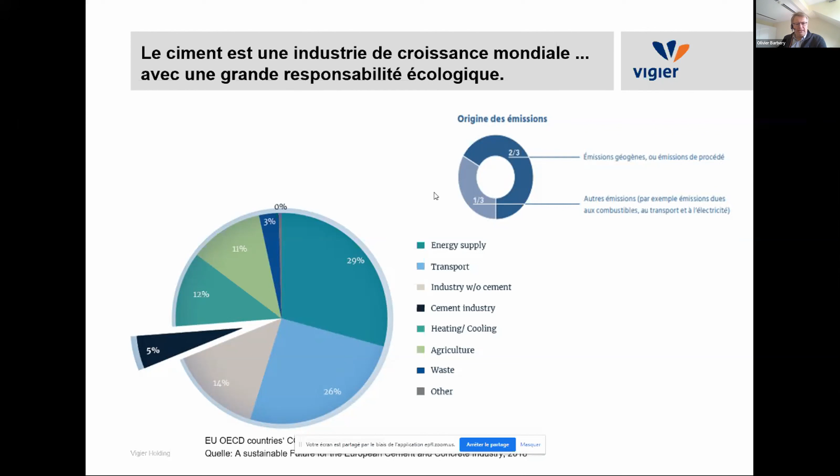Si on regarde concrètement sur Ciment Vigier ce que ça signifie en termes de développement durable, on a la chance de posséder une carrière, donc un accès aux ressources de marne et de calcaire, les éléments principaux pour former du ciment. Cette carrière est située à Péry, à côté de notre usine, et a la particularité d'avoir une autorisation d'exploiter pour encore 90 ans. C'est une spécificité du canton de Berne: le ciment a été reconnu comme matériau indispensable par la Confédération suisse, et le seul canton qui a traduit ça concrètement en donnant des autorisations d'exploiter en conséquence a été le canton de Berne. Ça nous donne un avantage énorme par rapport à nos concurrents, puisque l'actionnaire qui investit chez nous sait qu'il le fait avec la perspective d'un accès aux ressources garanties pour les 90 prochaines années.

Tout commence donc à la carrière, par l'exploitation, et même si c'est un élément mineur de l'impact environnemental, le transport des matériaux vers l'usine a déjà un impact. On est très fiers chez Ciment Vigier d'avoir été, en 2018, à l'origine de la fabrication du premier dumper électrique autonome, qui travaille chez nous depuis 4 ans maintenant. C'est toujours une première mondiale, il n'y a pas eu d'autres exemplaires, et c'est lié à la particularité de notre site: nous avons un site downhill, on exploite le sommet de la carrière et on descend les matériaux vers le concasseur. Ainsi, si le camion descend chargé avec 65 tonnes de matériaux, comme on le voit sur la photo, il va pouvoir charger ses batteries en descendant, et utiliser cette énergie emmagasinée pour remonter à vide.

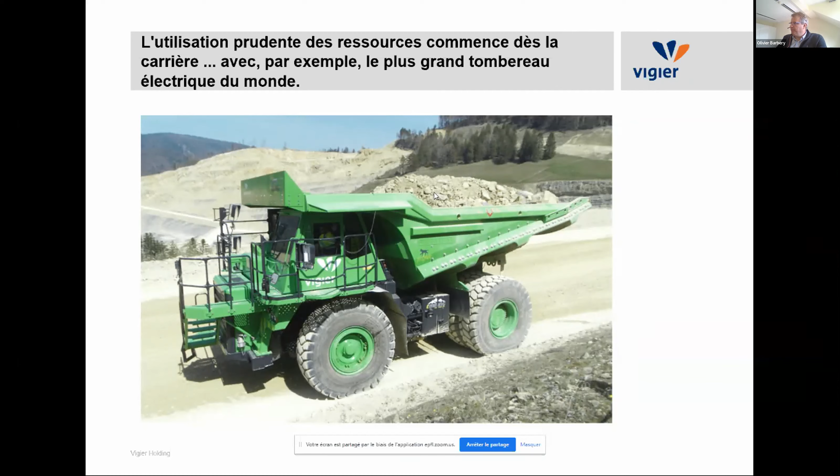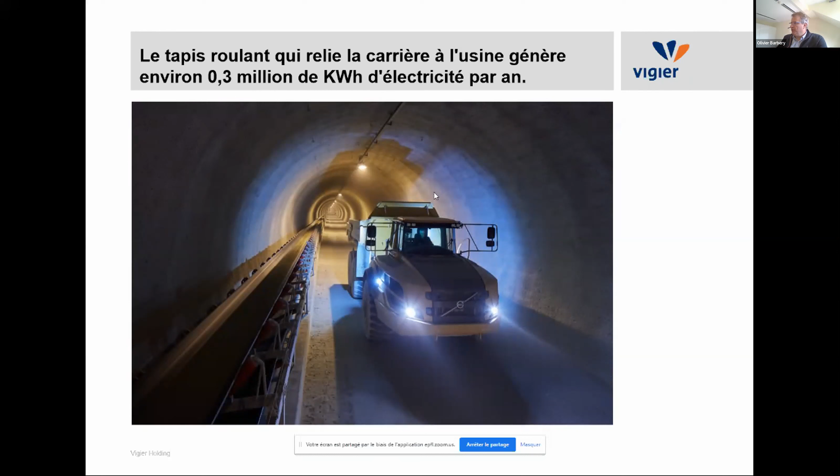Les matériaux sont ensuite amenés à travers un tunnel sur la bande transporteuse à gauche. L'alternative serait de les descendre avec des dumpers électriques ou traditionnels, mais nous travaillons avec une bande transporteuse qui profite également de la différence de niveau entre la carrière et l'usine pour produire son électricité, à peu près 300 000 kWh par an, ce qui correspond grosso modo à la consommation électrique de tous les transports internes de l'usine. Donc tous les matériaux transportés dans l'usine, toute l'énergie électrique nécessaire à leur transport en interne, sont couverts par ça.

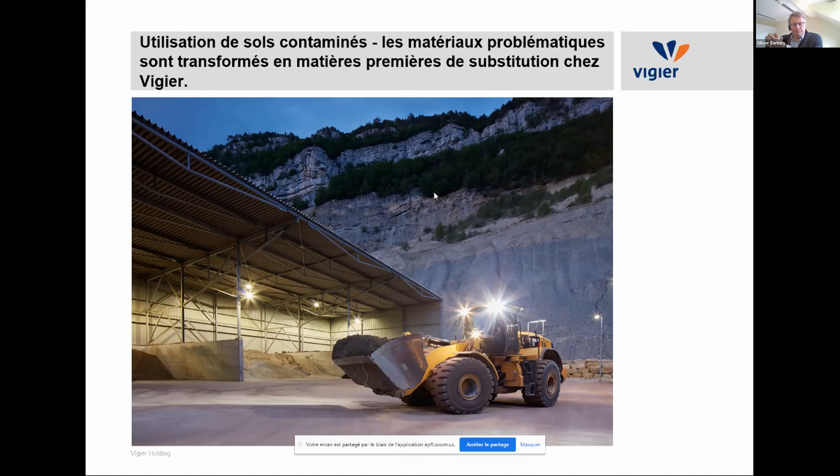Enfin, concernant les matières premières naturelles, afin de minimiser l'impact sur la consommation de ressources naturelles, on a développé depuis plusieurs années la substitution de matières premières par des matières premières alternatives, très variées: ça va des terres polluées jusqu'à des cendres issues de processus de combustion comme la fabrication du papier. Chez Ciments Vigier, cette année, on va être à peu près à 15% de substitution, et l'année prochaine on ambitionne d'atteindre ou dépasser les 20%. On consomme à peu près 1 million de tonnes de matières premières par an venant de la carrière, et on espère dès l'année prochaine en substituer 200 000 tonnes, ce qui veut dire que chaque 5 ans, on allonge la durée de vie de la carrière d'1 an. Ce sont toutes des choses concrètes qui existent.

Tous ces matériaux, après broyage, dans les bonnes proportions et la bonne chimie, vont être brûlés dans un four à très haute température, puisque la température que la matière doit atteindre pour former le clinker, qui sera le principe actif du ciment, est de 1450 degrés. On a à Péry un four dit moderne - je souris en disant ça car il date de la fin des années 60, mais en termes de technologie, il n'y a pas eu de meilleure technologie depuis. C'est un four voie sèche avec précalcinateur.

Et donc, dans ce four, entre 0 ou 20 degrés et 800 ou 1000 degrés, le CO2 contenu dans la pierre, donc dans le carbonate de calcium, va partir. Ensuite, la matière va être cuite dans le four. Pour cette cuisson, on utilise des combustibles. Le combustible traditionnel chez Ciments Vigier, c'est le charbon, mais ça pourrait être le gaz naturel ou le schiste, etc. Il y a différentes possibilités.

Un moyen de réduire l'impact CO2 lié à la combustion, c'est de remplacer ces combustibles aussi loin que possible par des combustibles biogènes ou par des combustibles alternatifs. Donc le principe de l'usage des combustibles alternatifs peut être résumé sur ce slide.

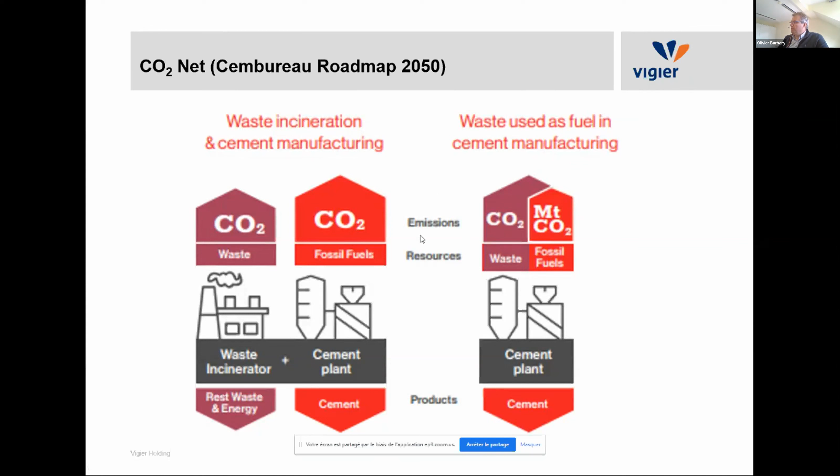Par contre, les déchets et leurs parties cendreuses vont être incorporés comme matière première dans le clinker et donc dans le ciment, et on produit du ciment. Donc vous comprenez le bénéfice: en faisant ça, on va éviter des émissions de CO2 au niveau de l'incinération. C'est le principe de fonctionnement du remplacement des combustibles nobles par des combustibles alternatifs.

Dans le cas de Ciments Vigier, j'ai repris ici les résultats 2021. En 2022, on termine le mois d'octobre aujourd'hui, et on est sensiblement sur les mêmes bases que 2021. Donc, en 2021, on a substitué 97,3% de nos combustibles fossiles par des combustibles alternatifs, et de ces 97,3%, pratiquement 38% étaient des combustibles biogènes.

Les combustibles biogènes, comme le bois de démolition ou de construction, sont considérés comme neutres au niveau CO2. Et si on parle de bilan net de CO2, on peut considérer l'ensemble des combustibles alternatifs.

Sur ce graphique, depuis 2015, pour reprendre les 6 dernières années, on est passé de 80% de substitution à 97,3%. La moyenne suisse, nous y compris, c'est la barre sur la droite — ce sont des chiffres publics, publiés par cemsuisse. En 2020-2021, ils étaient au même niveau, 69,5% de substitution. Si on prend la moyenne européenne, elle est aux environs de 50%.

Vous voyez qu'on est très fiers dans l'usine de Péry d'avoir réussi à pousser l'exercice quasiment jusqu'aux limites, puisqu'on n'est pas autorisé à démarrer un four avec autre chose que des combustibles nobles. Dans notre cas, c'est du light oil, de l'huile légère, et ça correspond à 2,5% de notre consommation énergétique.

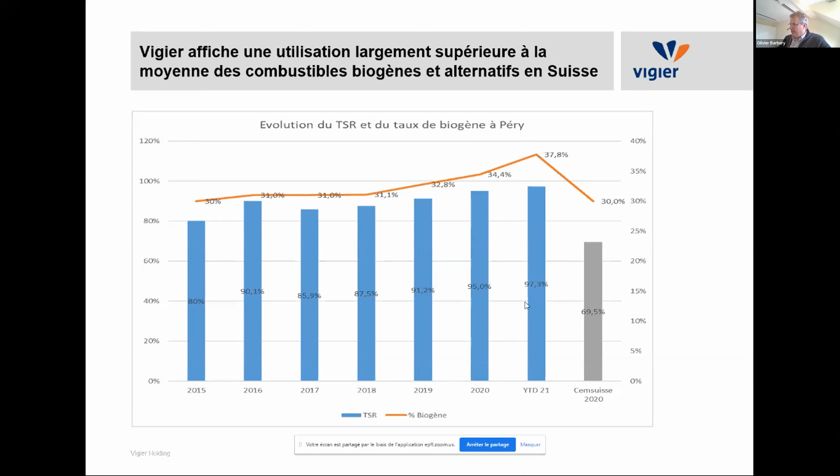Donc on a encore un potentiel d'amélioration de 0,2%; on est quasiment virtuellement à 100% de substitution. Ce qui veut dire concrètement que, dans l'impact CO2 de nos produits, cette partie combustible peut être enlevée. Ça montre que c'est possible et que c'est possible de le produire. On l'a fait pendant une année complète, et donc ça fait partie des leviers qui existent pour l'industrie pour solutionner cette partie — un tiers des émissions de CO2 qui vient des combustibles.

Si on regarde le bilan CO2 net de Ciments Vigier sur l'ensemble des produits ciments produits chez nous, par rapport à l'année de référence de 1990, on a évolué de 667 kg de CO2 par tonne de ciment jusqu'à 408 kg, résultat de l'année dernière. Cette année, on est sur des prévisions proches de 400 kg, donc on continue à s'améliorer. Vous voyez que c'est possible.

La moyenne suisse, nous y compris, est plutôt de l'ordre de 550 kg si on regarde les émissions nettes de CO2. Donc vous voyez que l'exemple concret de Péry montre qu'on peut déjà faire des choses concrètement.

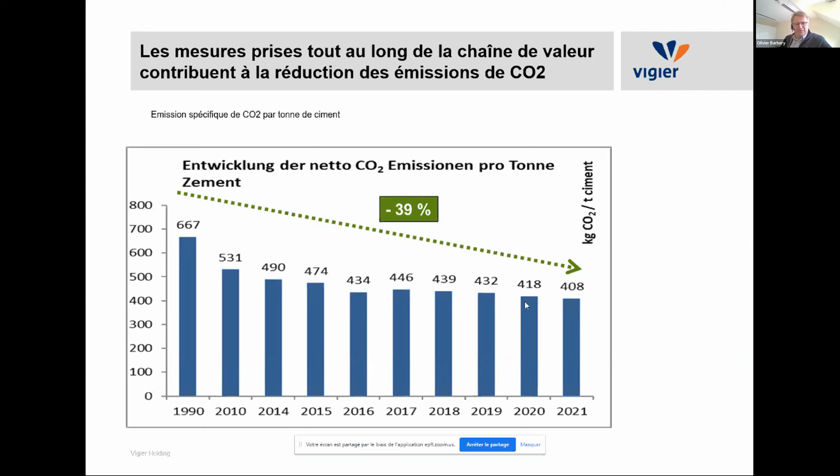Ce qui est sûr, c'est qu'au rythme actuel, on ne sera jamais à zéro émission nette de CO2 en 2050, qui est notre objectif. Pour ce faire, il faut accélérer l'évolution. À titre d'illustration, cemsuisse, la faîtière suisse de l'industrie cimentière, a publié, sur base de chiffres concrets, les 6 leviers à la disposition de l'industrie pour atteindre l'objectif de zéro émission nette de CO2 en 2050.

Donc ça, c'est à nos collègues concurrents de réaliser la chose. Le deuxième levier, c'est de mettre moins de clinker, donc qui est le produit issu du four, de la cuisson, dans les ciments. Là, il y a encore aussi un potentiel de 17% par rapport à la situation actuelle. Et ça se fait comment? Ça se fait par l'optimisation des recettes, donc avoir un clinker le plus efficace possible pour en mettre le moins possible dans le ciment.

Ça passe aussi par l'utilisation de matières premières décarbonées. Je vous ai cité l'exemple des cendres de papier. Donc, tout déchet cendreux issu de l'industrie, une industrie thermique, est potentiellement une source de matière première pour nous, avec l'avantage que tout le calcium qu'il contient aura été théoriquement décarboné. Donc, plutôt que de les mettre en décharge, il vaut mieux essayer de les réutiliser comme matière première secondaire dans l'industrie cimentière. Et enfin, on a des nouvelles formulations de béton.

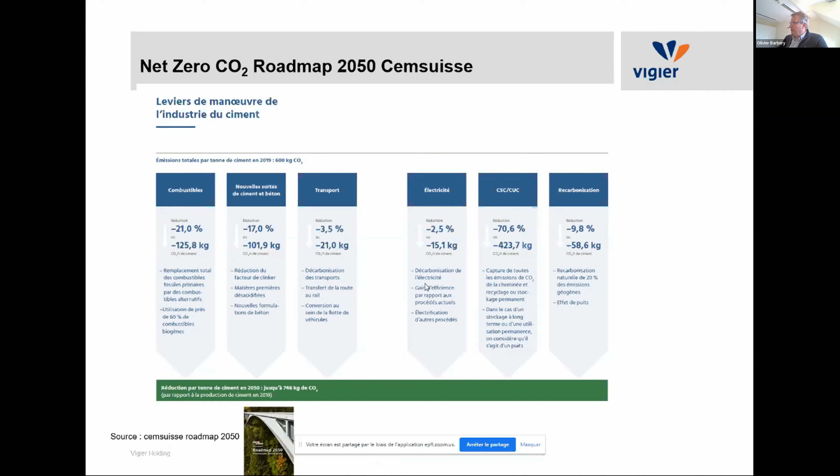On estime que nous, on devra sauver environ 300 kg de CO2. Le reste du travail aura été fait. Au niveau du transport, je voulais juste dire, pour terminer sur cette note, qu'on a acquis un camion 100% électrique et un camion toupie béton également 100% électrique chez Vigier, ce qui nous permet, depuis la carrière jusqu'à nos clients finaux, de sauver aussi ces 3,5% de CO2.

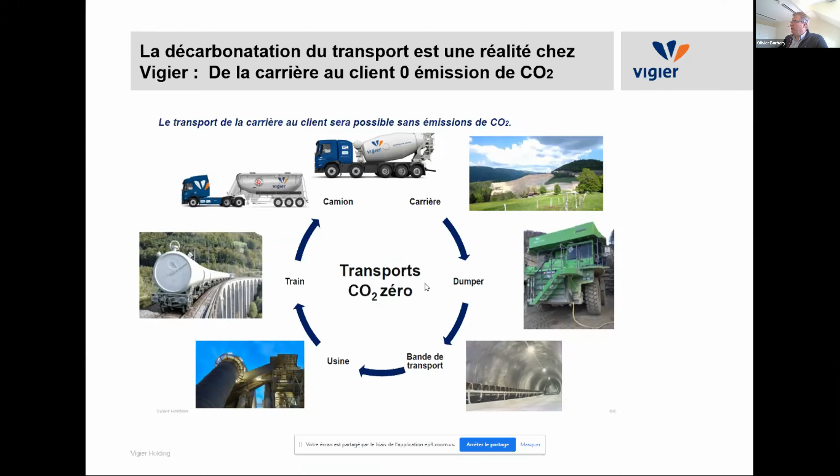Donc voilà la conclusion. On s'est engagé à décarboner nos produits et notre processus d'ici 2050. Au niveau des produits, on est pas mal avancé, mais il reste encore un peu de chemin à faire, à peu près un tiers du chemin. Et au niveau du processus, ça passera par le Carbon Capture and Storage et le Carbon Capture and Usage, auquel nous, en tant que groupe cimentier, on croit. Donc, transformer ce CO2 émis à notre cheminée en un produit utile ou en une énergie utile.

Et pour ce faire, vous l'avez compris, on a besoin d'avoir, ou qu'on nous garantisse, une forme d'accès au marché des combustibles alternatifs, qui est une priorité, mais aussi que les mentalités évoluent et qu'au niveau des matières premières disponibles, qu'on s'éloigne du tout à la décharge pour aller vers des solutions de recyclage ou de valorisation, notamment chez nous en cimenterie.

Voilà. Merci Olivier, encore une fois pour cette présentation très intéressante et la réponse aux questions.

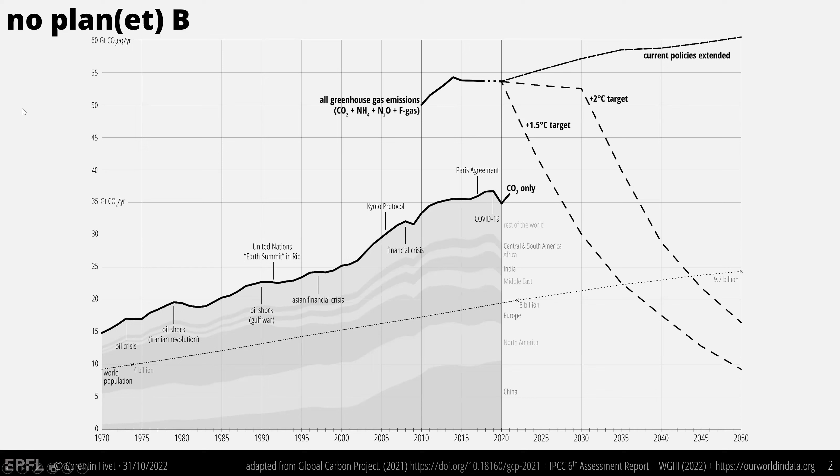All right, so a few things have been said. The discussions were very interesting, at least what I could grab from it. I just wanted to show this graph again, to remind that yes, we should try to limit our CO2 greenhouse gas emissions as much as we can, but we should also remember that whatever we do will never be enough, and so we should always try to do more in order to reduce those impacts.

Those are numbers that were given already in the previous presentations, except that here the numbers are from the worldwide CO2 emissions. And indeed, the construction industry has a huge responsibility in global warming. 11% is a lower bound. According to more recent numbers, we can extract some percentages that are attributed to other industries and realize that they're actually related to the construction industry.

And so CO2 emissions related to the activity of constructing buildings, infrastructure, and demolishing it are responsible for about 20%, maybe even a bit more, of all CO2 emissions. And next to it, we see also that 28% are related to the operation of buildings, so the heating, the cooling, the electricity needed in buildings and so on.

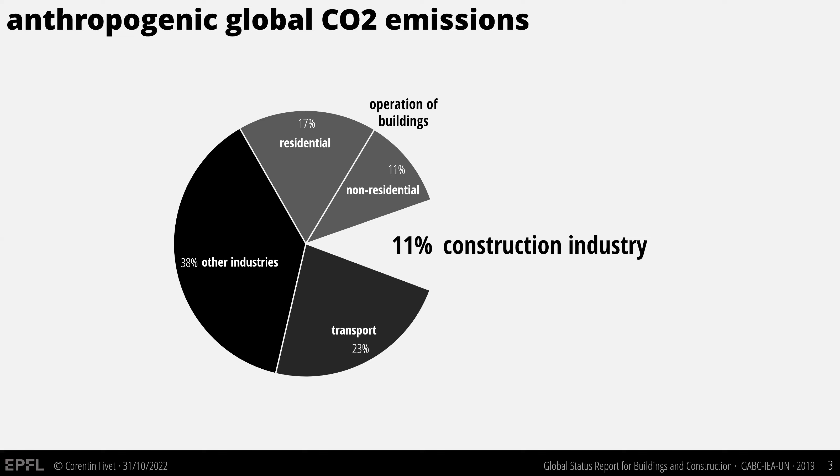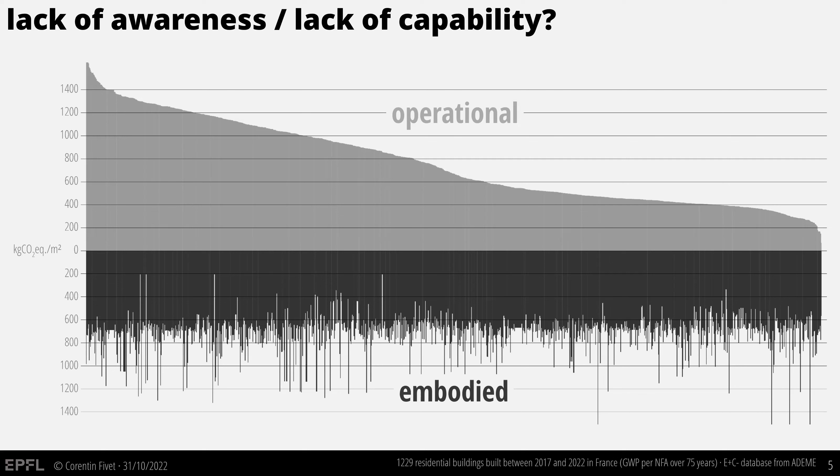But there is still a question on whether society, the industry, can actually reduce this embodied share in buildings, because on the bottom part of this graph, we clearly see a kind of threshold. So can we actually reduce the greenhouse gas emissions per square meter of new buildings? That's almost an open question at the moment, and should not be.

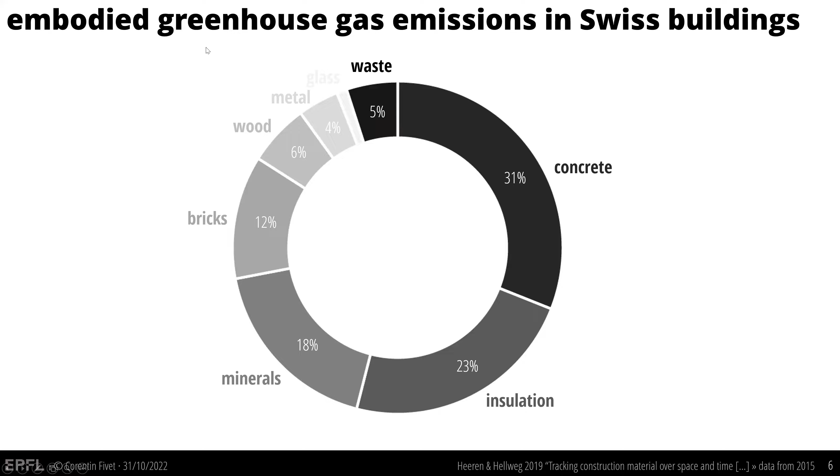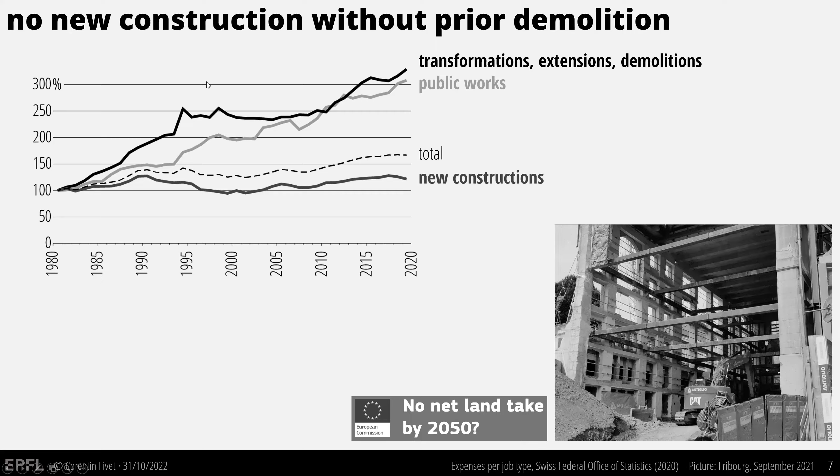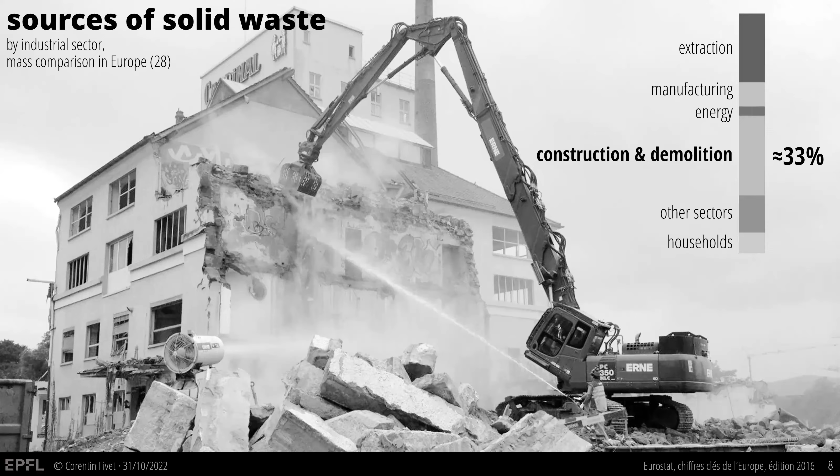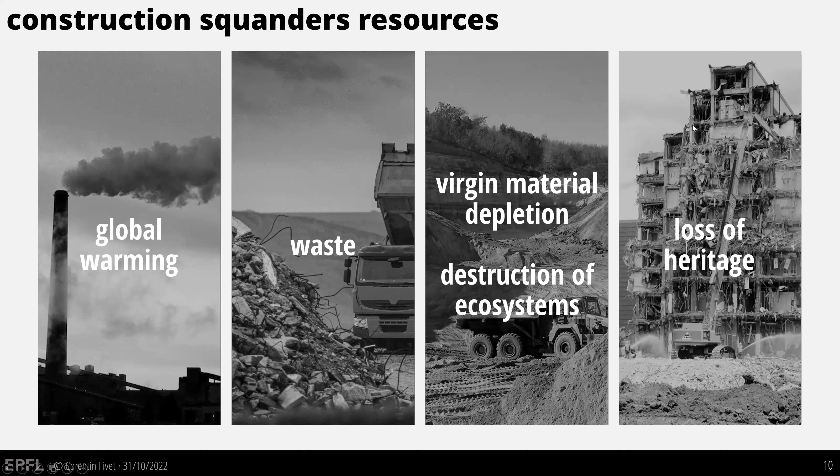And as a consequence, as was presented earlier, the construction and demolition industry accounts for 33% of all solid waste, which is not negligible. So the construction industry, in short, squanders resources: global warming, waste. There are also issues related to virgin material depletion, and more precisely to the ecosystems that are destroyed on the way. And every time we demolish, we also lose a part of our heritage and investment made earlier. So one direct conclusion we can draw is that construction is injurious to Earth.

Yes, we should try to avoid, reduce the CO2 emissions by improving the processes that we are commonly using, as was presented before. But the very first question is indeed this one: shall we construct? Shall we demolish? Shall we transform the built environment? And probably if we ask that question before every single operation, we could realize that most of those transformations are not necessary.

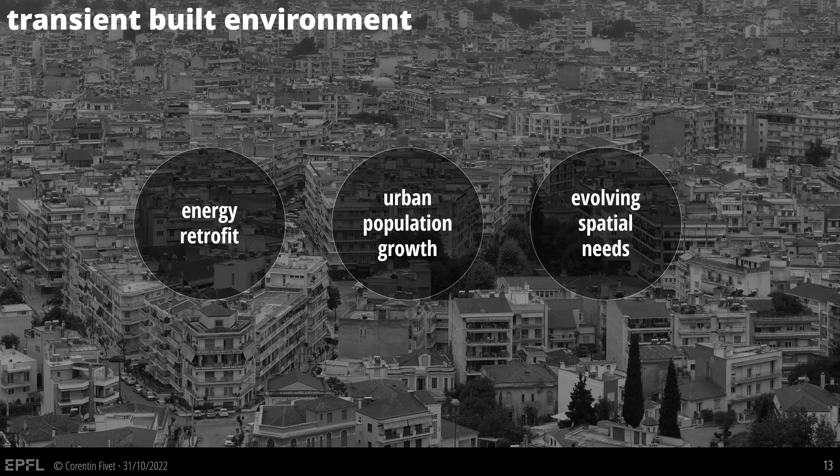But there are other transformations that remain needed. Buildings, we need to insulate them. So there is a need for energy retrofit, which also has an impact on embodied emissions. There is also a need to welcome more people in dense areas in Europe, but also elsewhere in the world. And we've seen it with COVID: there is also a need to quickly change the spaces that are provided by architecture. And so the built environment is transient. We need to replace some of it, and the question is how to do it.

And one first remark that we should make is that most of the time when we demolish a building, the building is of good quality. We didn't need the spaces provided by the buildings that we have here in front of us, for instance, in Fribourg, but the beams, the slabs, the walls were still of good quality. And so it's not because we don't need the spaces provided by the buildings that we do not need the materials that make those spaces available.

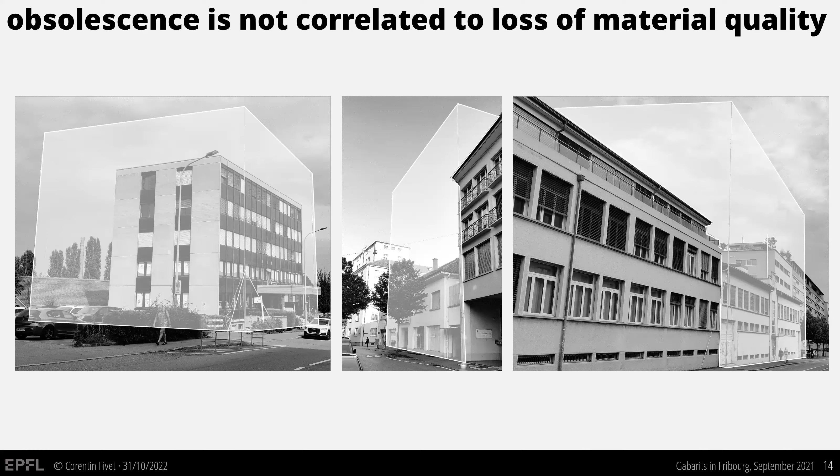And realizing that allows us to better understand what can be done through the principles of circular economy. In circular economy, the goal would be to maximize the service life of existing products through different strategies in a given hierarchy. First we want to use the existing products as much as we can, and only if we cannot, we adapt those products on site, and we see a loop being created on top of these graphs. And when we cannot adapt the products on site, then we can reuse the parts in new systems, in new locations for new purposes.

And then we go back up this graph, and the new systems, we want to use them as much as we can. Maybe we adapt them, and maybe we reuse the parts again and again. And only after that, once we cannot reuse the parts, then recycling, so reprocessing the material, would be an option. Currently, when we speak about circular economy in many contexts, recycling is the main first strategy that comes to mind, but it's actually the very last one on the ladder.

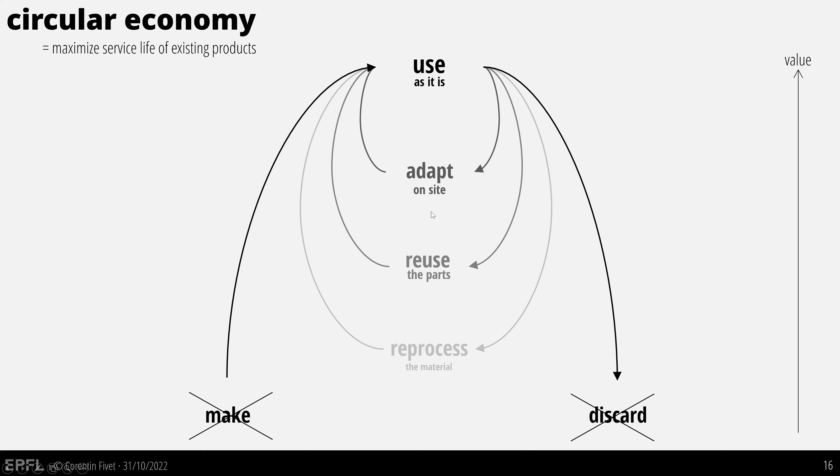Reuse, so what does that mean? It's always better to understand it through examples. Here is an example that I show a lot. It's a timber bridge that was built in 1810 over the Rhine River at the border between Switzerland and Germany. 100 years later, it was decided that the bridge was too small, not high enough, so the community decided to replace it with a bigger one. But some monks from a monastery nearby reclaimed some of these beams and columns in order to build the barn pictured on the bottom of this slide.

And we can actually see traces of the cuts in the columns. Those traces are the testimony of the previous use of those beams in the bridge. And that barn, built in 1920, is still in use today. The picture is from 2019, but it's still standing. So in the end, we have a 100-year-old building made of components that are 200 years old. And that's really the goal of circular economy and reuse: to have construction components that last longer than the buildings they are part of.

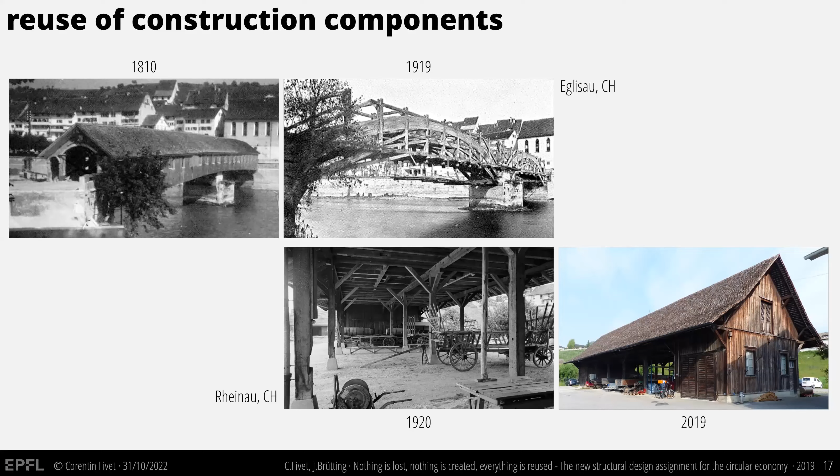And today in the construction industry, reuse is moving a bit. We see more and more startups providing services to reuse building parts, but what is mainly reused are not load-bearing components such as the ones shown here. And if you remember the very first graph that I showed, if we want to reduce CO2 emissions through reuse, we need to also reuse load-bearing components. There are examples in the past, but not a lot. It's not common practice yet.

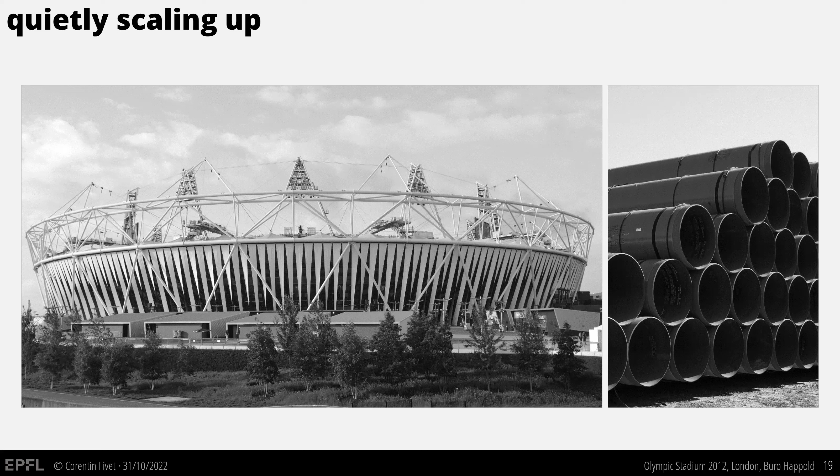Here is the London Olympic Stadium that was made with reclaimed oil pipelines that were ordered in too large quantities, and the engineers realized that by just changing the design of the stadium a bit, they could reuse those pipelines as new structural members. Here are other examples given by Toni Rüttimann, a Swiss engineer who built hundreds of pedestrian footbridges while reusing cables from ski lifts and oil rigs.

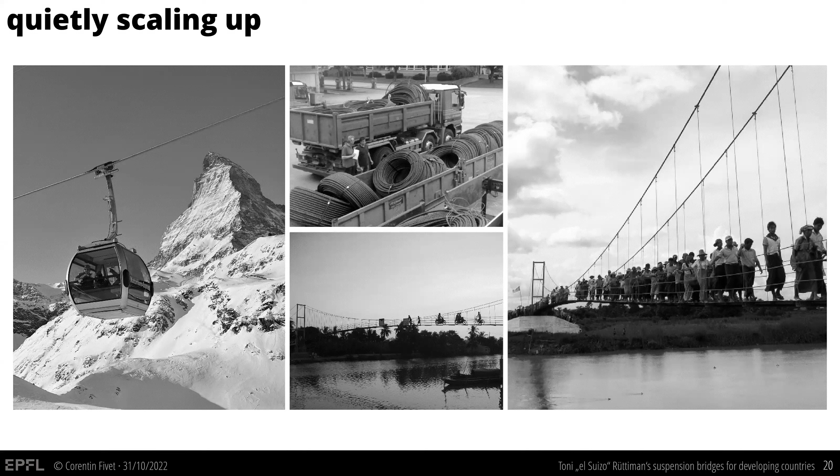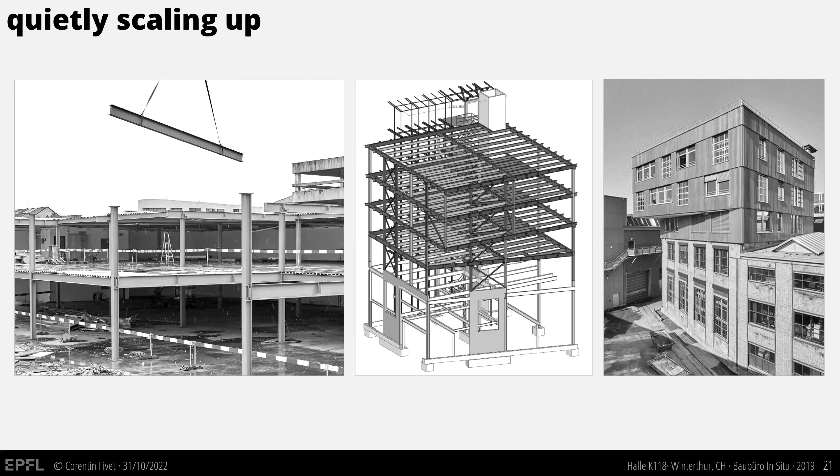So showing that, yes, components could be reused even for structural purposes. In Switzerland, the most published example so far, and the biggest operation so far, is this one here in Winterthur, where an existing building has been extended, and the load-bearing systems are beams and columns in steel that are reused from a distribution center.

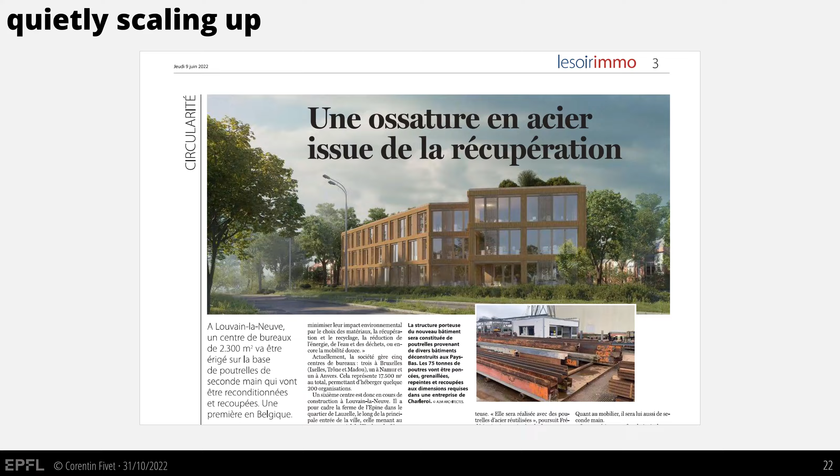Here is another example where 75 tons of old steel from the Netherlands will be reused for a new building in Belgium. But those are very unique examples, and the practice is not banal yet. So it's not like before the industrial revolution, where reuse was just common sense. It made sense in terms of economy. It made sense in terms of use of resources, of efforts to be put into the operation. And today that is not the case.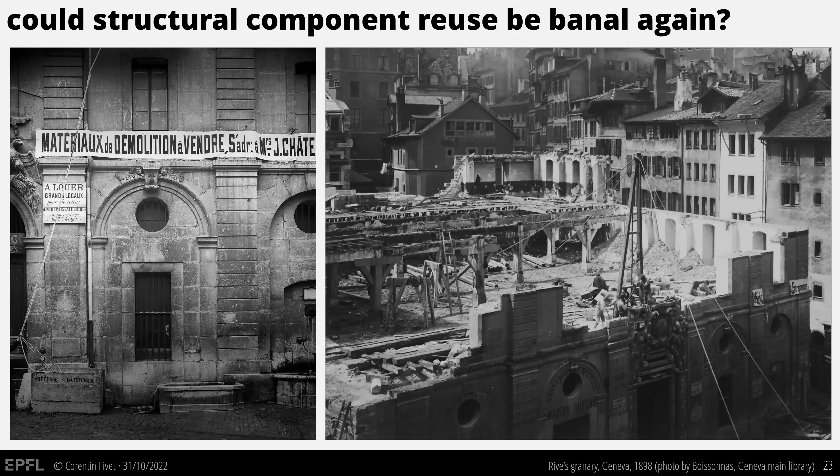And so the question that we ask ourselves at the Structural Exploration Lab is what can we do in order to make the reuse of load-bearing components more banal and more a common practice. I will show here two examples of things that we've been working on to see how the industry can evolve in that direction. The first thing to understand is that there is a change of design paradigm.

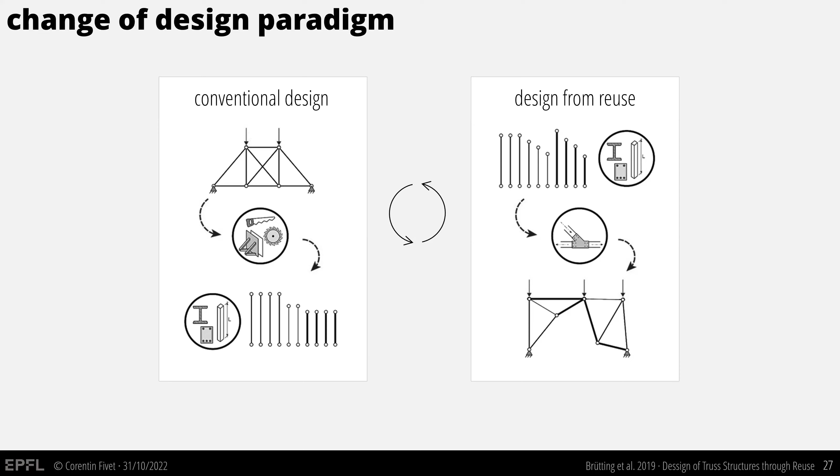So in the conventional design process, first the designers, architects, engineers would provide an idea of the main shape of the structure, and then little by little that structure would be analyzed, and we would end up with a precise description of how the pieces should be manufactured. When we want to reuse an existing stock, the members come with known properties. They have given lengths, given cross sections, given material. We cannot change them, and the new goal is to find the best way to reassemble them in the new structure. And usually the stocks to reuse can be very big and varied.

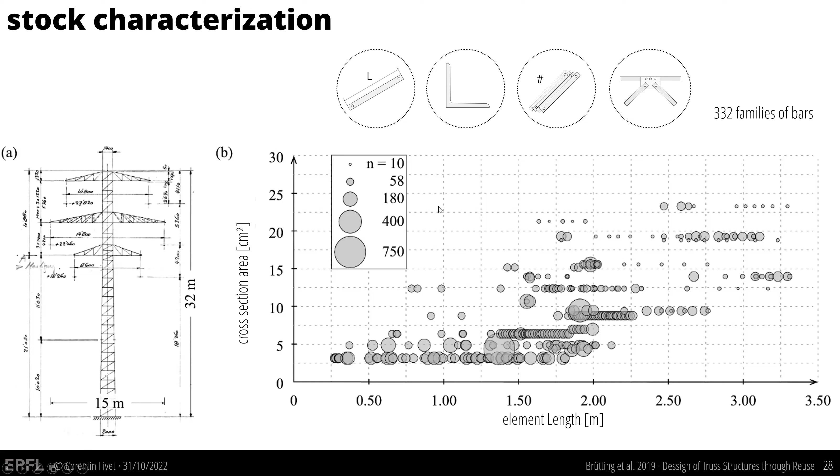Here is an example, a case study where we wanted to know how we could reuse those elements from electric pylons that are about to be dismantled in the Valais canton. And you see that there were more than 300 families of different cross sections and lengths of bars. And the question was, how can we reuse them in order to build, for instance, the extension of the Lausanne train station?

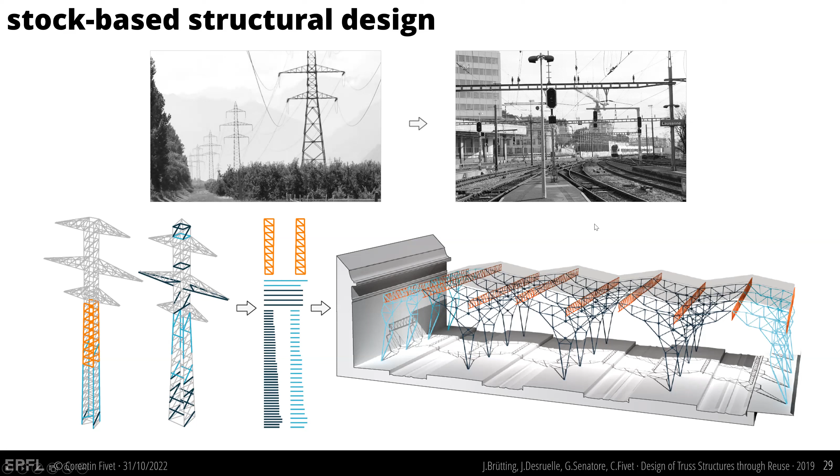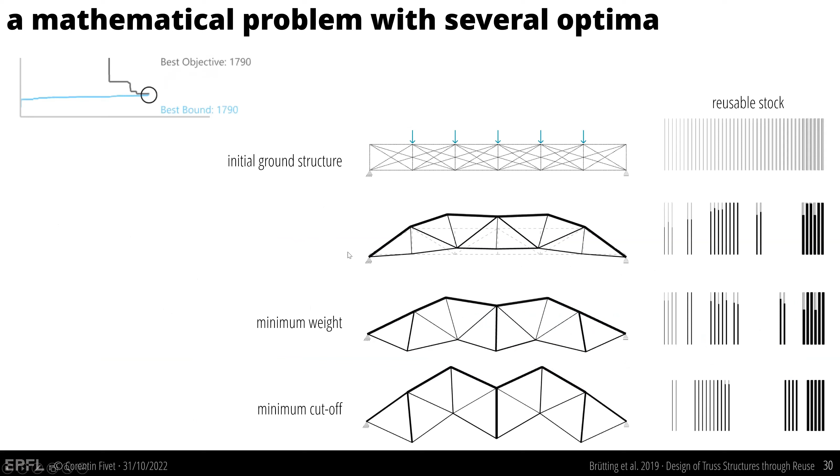And there are three questions to ask and to solve simultaneously. First is, what elements to get from the existing stock. Then it's where to put them in the new structure, and third is what should be the best shape for the structure that would minimize embodied carbon. And all these three questions can be solved simultaneously with optimization procedures, and we would get different answers depending on the objective functions that we put.

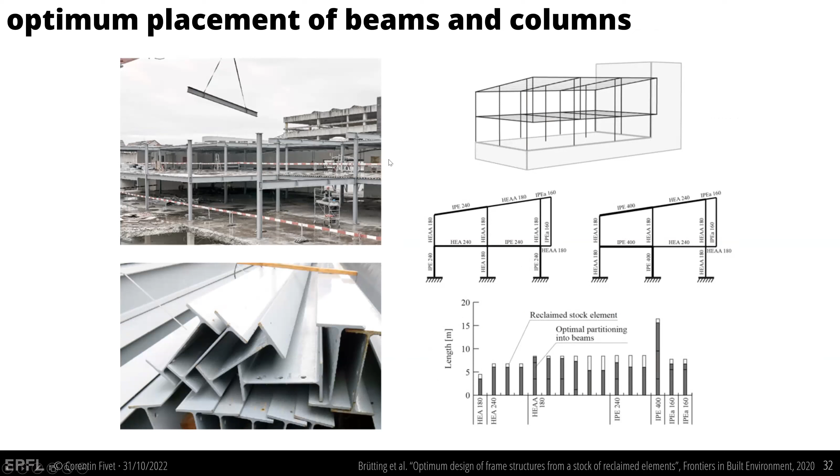And the same is true with trusses, but also with frames like the ones we saw earlier. So if we have a stock of beams and columns, what should be the best reassembly in the new building in order to reduce CO2 emissions? And if we do comparative life cycle assessments, where we compare a structure made of reused timber or reused steel with one that is made of recycled steel, for instance, then we see that there is always a reduction that could go up to 60% less greenhouse gas emissions, and most of the time 50% less.

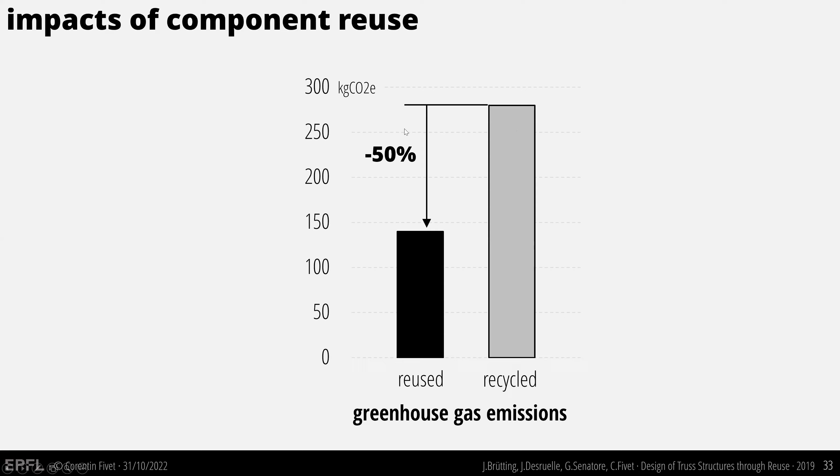We can also realize that the optimum solution that would minimize environmental impacts is not the one that only reuses components, but the one that replaces less efficient reused components with newly manufactured recycled materials. So the best solutions would be ones that combine at the same time newly manufactured recycled materials and reused components.

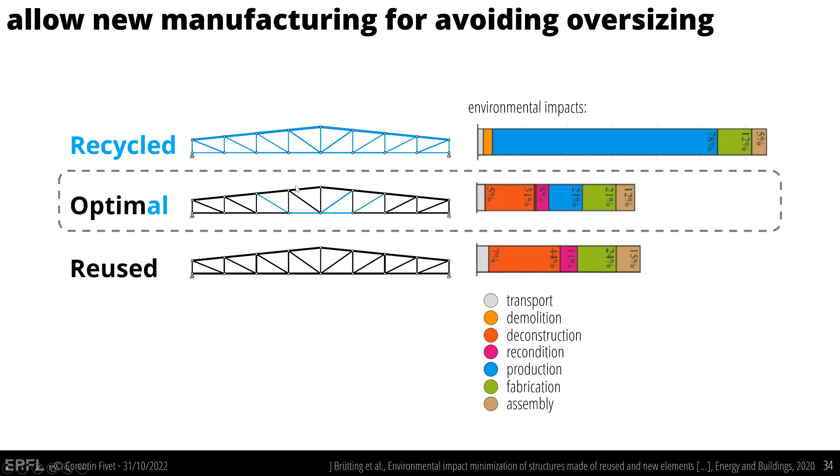Now, the last case study before the conclusion of this short presentation is one related to cement and concrete, since it was probably the unexpected topic of today. As was presented, we need cement, we need concrete, but the environmental impact of cement and concrete is huge, and we need to do something about it. 8% of all CO2 emissions worldwide are due to the production of cement. 30% of all waste in Europe is due to the construction and demolition of concrete.

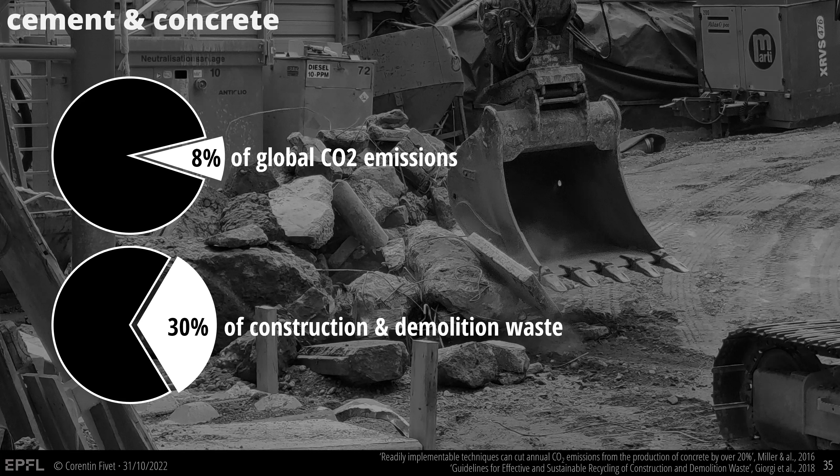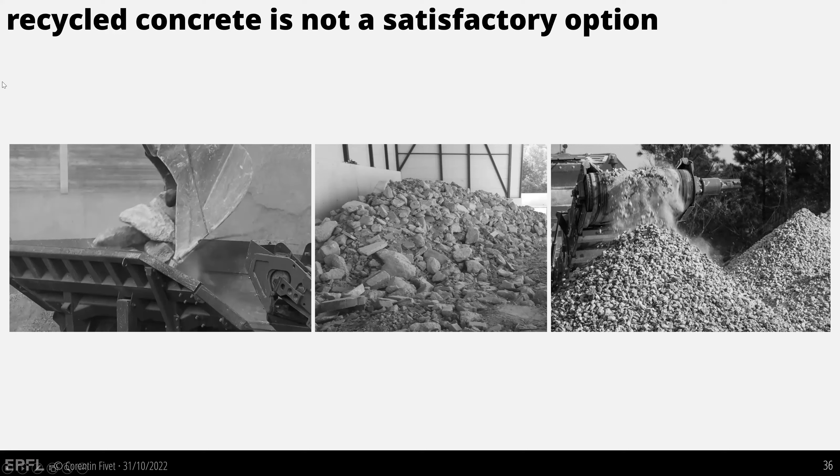Today, the best end of life for concrete consists in crushing the pieces and reusing the small crushed pieces as aggregates in new concrete, a concrete that we would call recycled concrete. So while that process allows us to avoid the extraction of natural aggregates, actually the process doesn't change anything in terms of CO2 emissions. So if we compare recycled concrete with these techniques to a newly manufactured concrete, the two would need the same amount of cement and would have very similar environmental impacts in terms of greenhouse gas emissions.

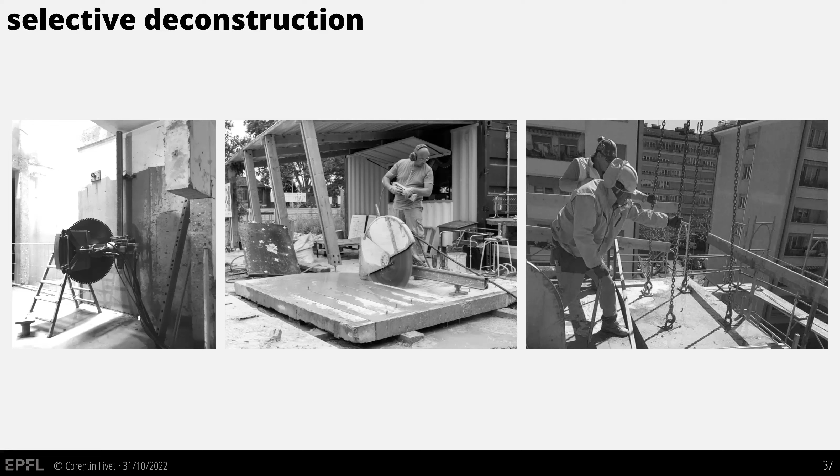And so an alternative way is to not crush the concrete, but to apply a selective, clean deconstruction of the pieces. So before recycling the concrete, we could reuse the components as they are. It's not a replacement of recycling, it's an extension, a delay of the recycling process. Today, cutting walls and slabs with diamond saw blades is a common practice, mainly in dense urban areas. But the pieces are not valued for what they are, and so we would still crush them afterwards.

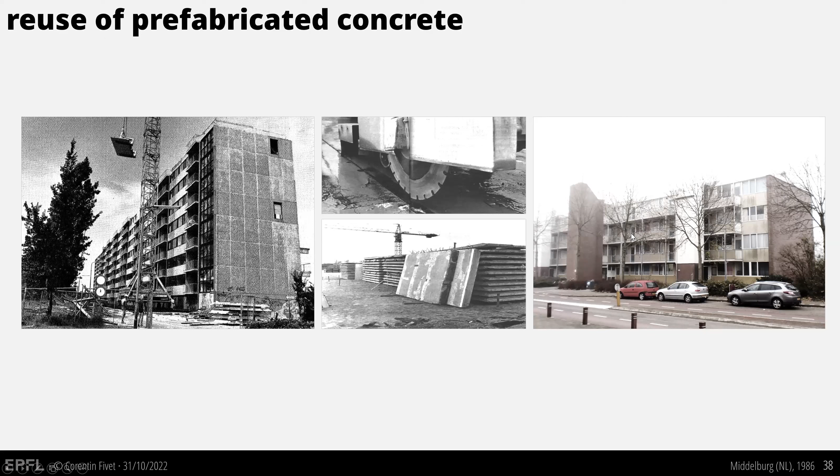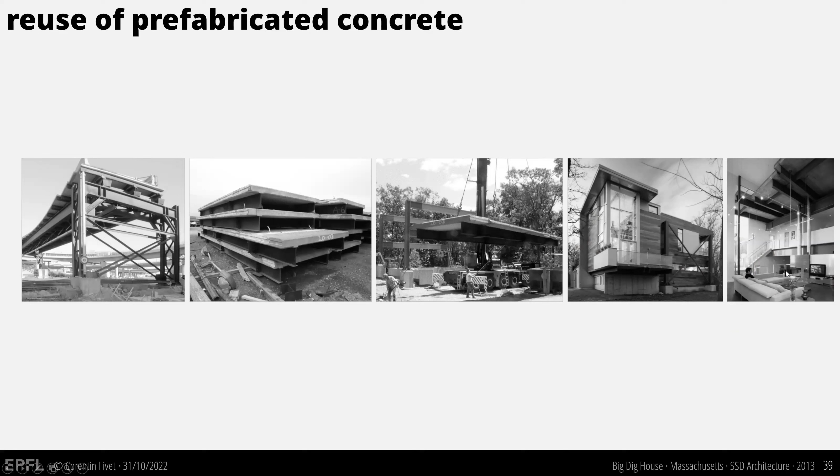Yet, if we dig into the history, we can identify a number of case studies where huge pieces of concrete were reused. Here we are in the Netherlands, where very big apartment buildings have been dismantled, carefully cut, and the slabs and walls are reused in other smaller buildings, the ones that we see on the right. Here is an example in the US from 2013, where temporary slab decks from a temporary highway were reused to build the load-bearing system of a house nearby.

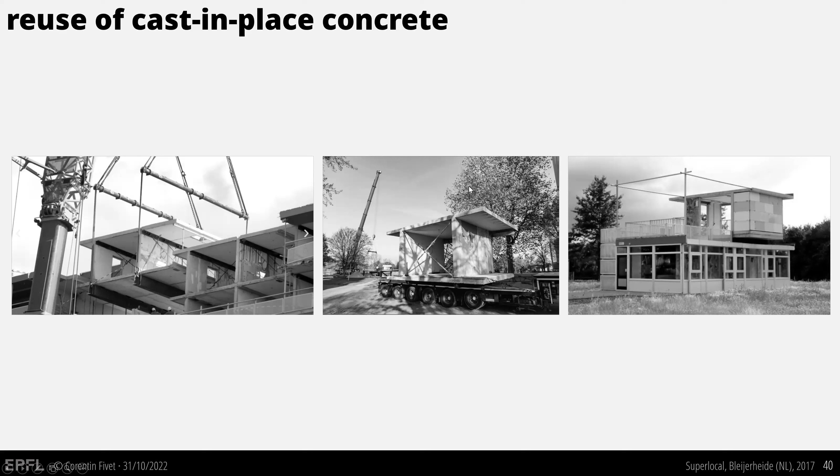In Switzerland, most of the concrete that is put in place is cast-in-place concrete, not prefabricated concrete, and so we wanted to show that even that concrete could be valued and reused in new applications unrelated to its previous use. And so we built this footbridge out of pieces that were cut from the walls that we see here. Those walls were cut because they are inside a building that was being transformed. And just for the little story, the building was not older than 10 years when those pieces were cut, when the need for new spaces was identified. For the construction company, it made sense to cut those pieces into small blocks, because it also eased their transport.

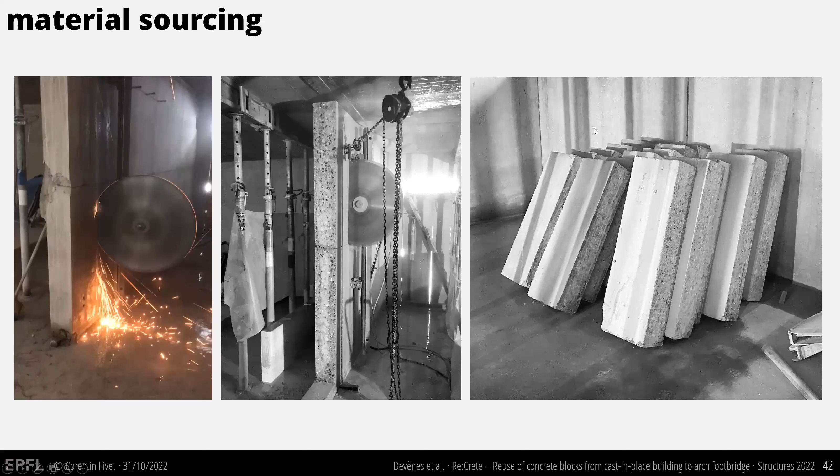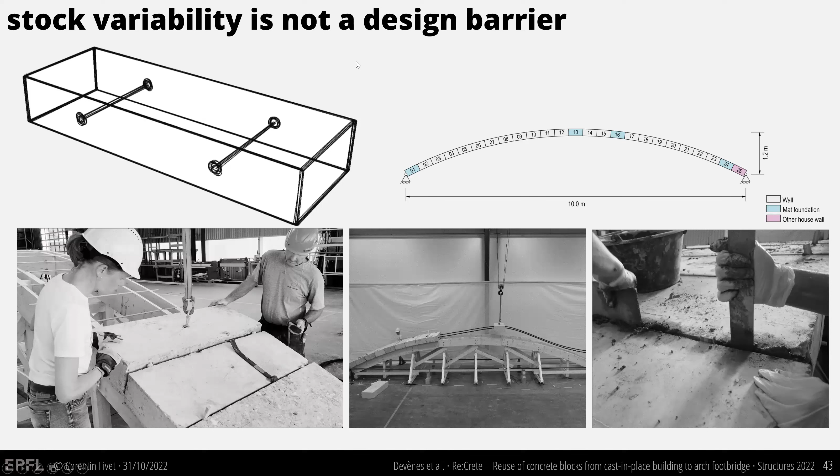We took those blocks, and of course, as is always the case in reuse, every block has a different size, different length, thickness, width, and we also wanted to have cuts inside. The construction industry is not very precise, especially the concrete industry. There are a lot of tolerances, and there is variability in the stock. Every piece is different, but if we adapt the design process accordingly, this is not a barrier, not a constraint, and it's actually no more complicated to reuse pieces than to build, for instance, this arch bridge with new pieces.

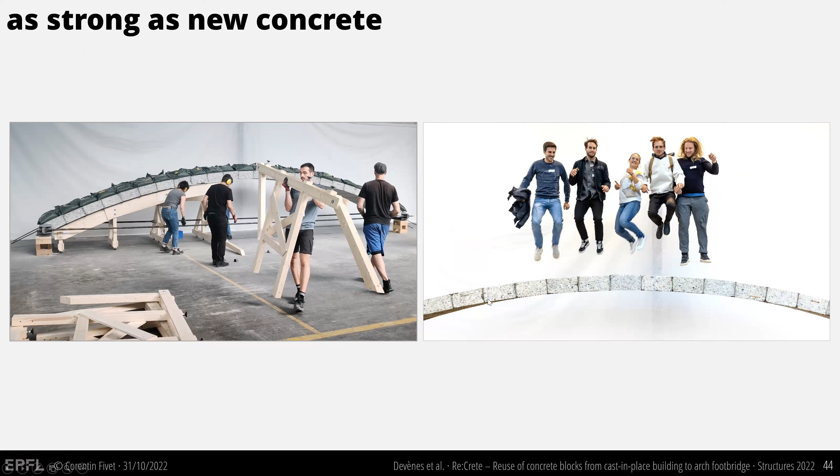And in the end, we end up with a footbridge that is as strong as new concrete, so same qualities, but it didn't require any casting of concrete. It didn't require any new production of cement, except for the little joints that we have in between the blocks.

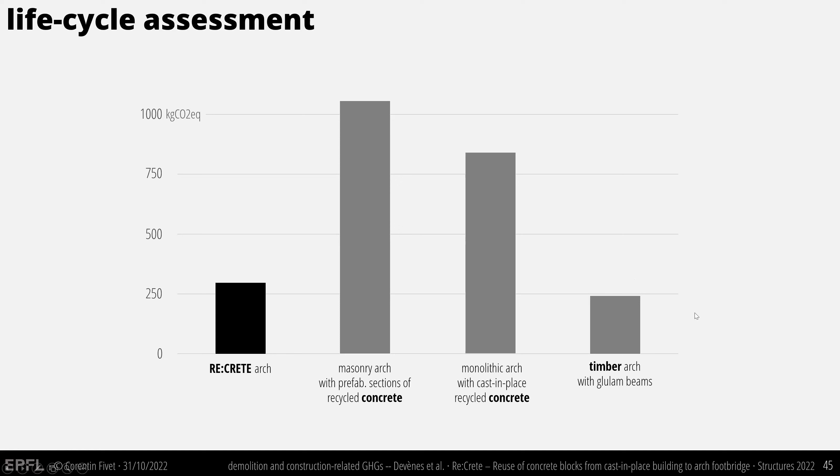If we do a life cycle assessment, which we should always do, we realize that reusing the concrete blocks, this is the graph on the left, in the Re:Crete arch, allows a reduction by 3 or 4 of greenhouse gas emissions compared with the construction of the same arch made with cast-in-place recycled concrete. And on the right, you see the greenhouse gas emissions that would correspond to the production of the same arch with timber, with glulam beams. You can see that the environmental impact is very similar.

If we zoom in... Excuse me, Corentin, just so we keep a bit of time for the questions and the discussion. I'm sorry.

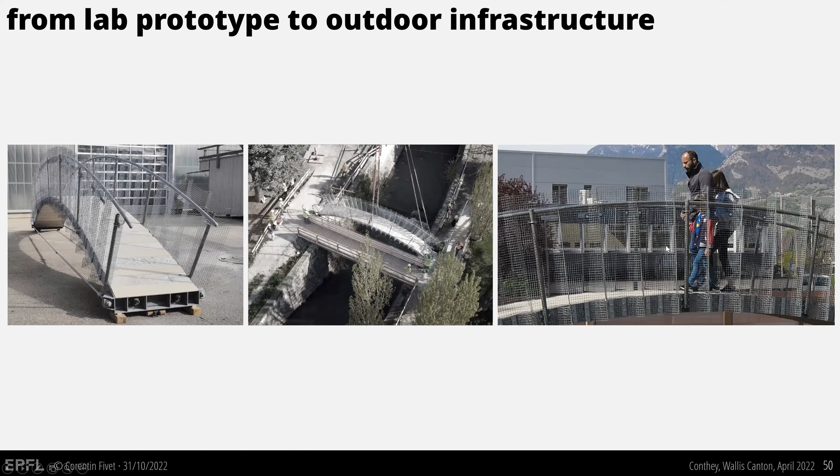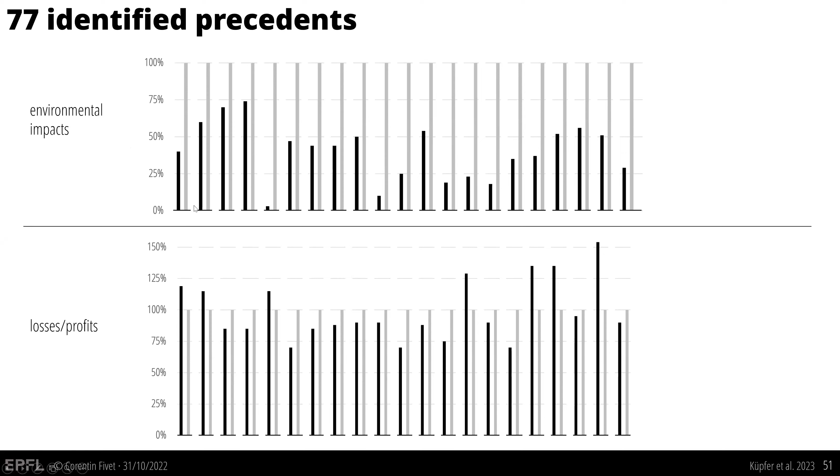But this is the main thing. So this bridge is now in use and tested on site to see how it behaves. This is just, again, previous studies showing that reusing concrete always allows us to reduce environmental impacts. Sometimes it's a bit more expensive, but we hope that this is only a temporary constraint. And this is it. Thank you very much.